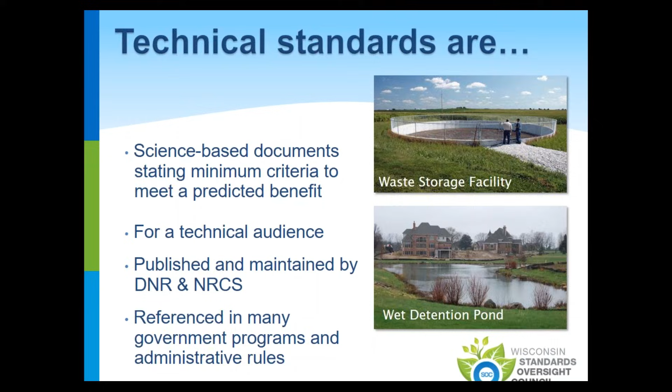SOC impacts these technical standards by deciding, with user input, which standards will be created or revised. SOC selects which of our three predefined processes will be followed, depending on the extent of changes we anticipate in the revision. SOC then supports the collaboration among users to create and approve new criteria. Through all of these updates, SOC seeks to ensure quality criteria, technical standards that can be applied uniformly across the state, and an open and accountable process.

Each technical standard we're going to discuss today followed what we call the full process. With input from the DNR, SOC formed a team of about 10 individuals for each of these standards. Teams were composed of the DNR, DOT, USGS, municipalities, sometimes academia, and always private industry. These teams spent about 8 to 10 months identifying strengths and weaknesses in the existing criteria, discussed their professional experience in the field, reviewed the latest research, and proposed new criteria where they thought it necessary to improve water quality protection and how the standards were implemented.

The new proposed criteria was then reviewed by about a dozen experts in the field and revised by the team based on those expert comments. Each standard was then released again, this time for a 3-week public review, and revised again based on those public comments. Teams wrote responses to each person who commented, explaining why or how each comment was or wasn't addressed. Finally, at the end of the process, each team submitted the document to the DNR for approval or for final tweaks to make sure it complied with DNR code.

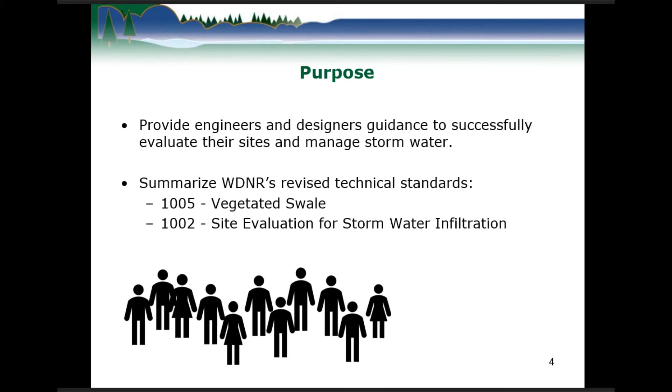I'm going to give an overview of the revised vegetated swale technical standard, and I'll generally follow the same order in which the topics are presented in the standard. I'll point out sections that changed compared to the original 2007 version and spend a little more time on topics for which users have indicated they'd like some additional guidance.

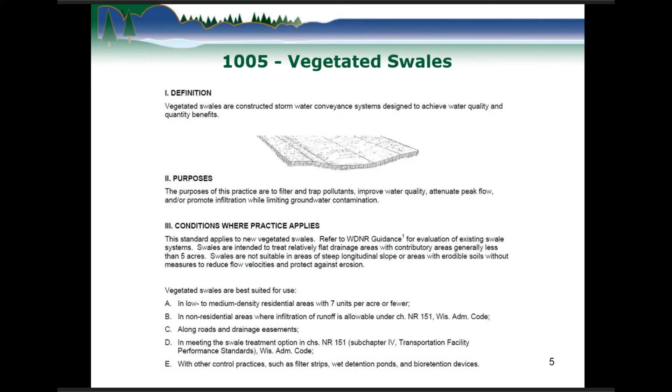Swales are somewhat unique as treatment devices in that they're generally designed to benefit water quality and quantity, as well as to convey runoff. The purpose of swales is to filter and trap pollutants, improve water quality, attenuate peak flow, and in most cases to also promote infiltration. However, swales are not trails, and they are also not parking lots. These activities can cause rutting and compaction, which we want to avoid in our swales.

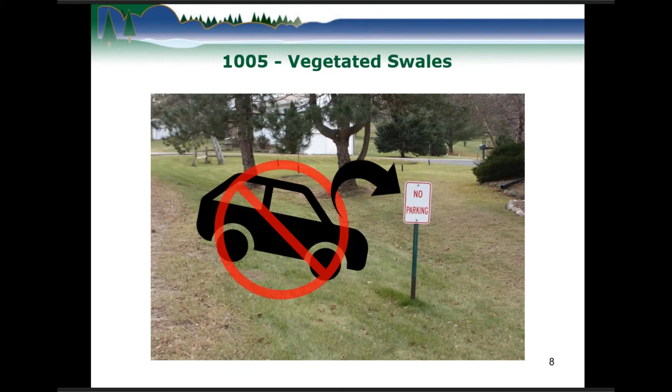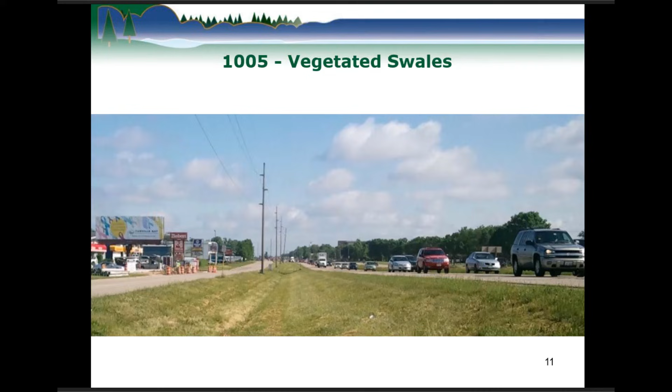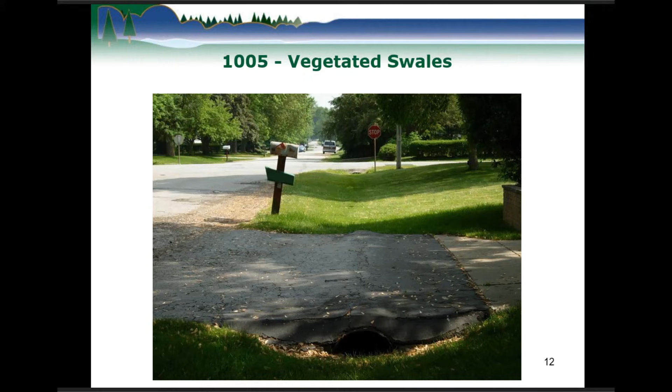Swales can be an effective option for managing runoff when space is limited, such as along roadsides. They also work well in low to medium density residential areas. Swales should generally not be used in areas where they would have a steep longitudinal slope or highly erodible soils, unless additional precautions are taken to reduce runoff velocity and protect against erosion. Swales are typically most effective for treating runoff from relatively flat drainage areas of less than 5 acres in size. Swales also work well with other practices such as filter strips, wet ponds, and bioretention areas.

When you have a rough idea of how your site will be laid out, but before you get too far into designing your swales, you'll need to determine if vegetated swales are a good match for your project. The primary means of sediment reduction in swales is through infiltration. However, in Wisconsin, infiltration of runoff is prohibited for certain source areas, such as some types of industrial facilities and fueling areas, or in certain locations, such as within a given proximity to supply wells. So it's important to do a thorough evaluation of your site to determine if infiltration and swales are a good match.

So let's say you've completed the site evaluation, determined the best areas for infiltration on your site, areas to avoid, and the appropriate infiltration rate to use in your design and modeling. The site plans need to show where the swales will be located in relation to structures, wells, any unusual geologic features, property boundaries, topography, and contributing drainage areas.

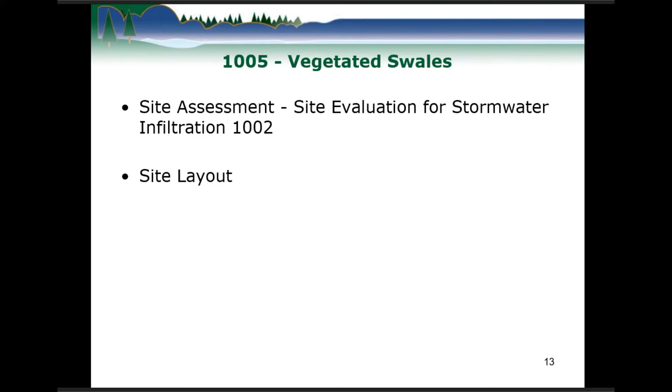For design and modeling purposes, it's also important to identify for each swale whether runoff will be entering a swale as concentrated point source or as sheet flow from the sides of the swale, or both.

In Wisconsin, the department requires stormwater construction permit applicants to demonstrate that their project will meet the post-construction performance standards in our rules. This is typically accomplished by modeling the treatment system and providing the modeling input and output to the department at the time of permit application.

A modeling parameters section was added to the Vegetated Swale standard to clarify meanings of terms sometimes encountered in modeling. One of those terms that we'll spend a little time on is the average swale length to outlet, which is an expression of how far runoff travels on average in a swale.

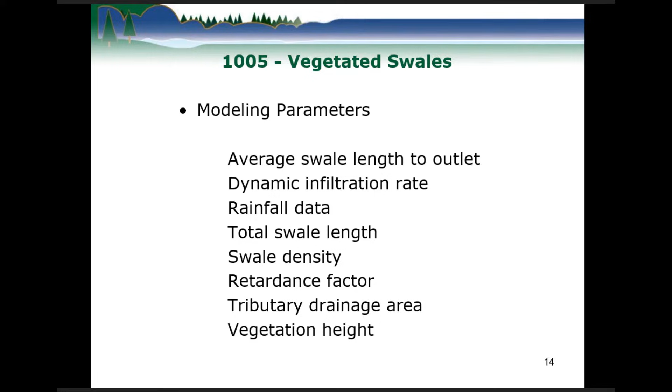Let's look at an example with a 600-foot-long swale segment receiving runoff as sheet flow along the entire length of the swale. Note that the lengths of culverts are not included in this total swale length.

For this example, the average swale length to outlet is simply calculated by taking the total swale length of 600 feet and dividing it by 2, which gives us 300 feet. We take this approach to account for the fact that some of the runoff enters at the top of the swale and has the full swale length available for particles to settle out and for runoff to infiltrate, while some of the runoff enters close to the outlet of the swale without any length of treatment.

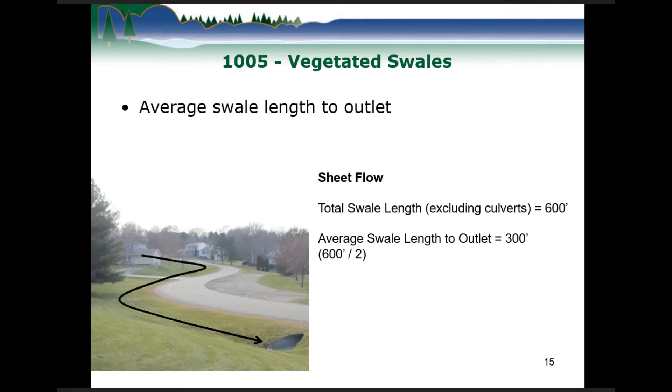In the modeling program WinSLAMM, when you edit the grass swale design parameters, you may need to check the box next to use total swale length instead of swale density for infiltration calculations. Let's see if I can point to it here, in order to allow entry of the total swale length and average swale length to outlet, as highlighted here.

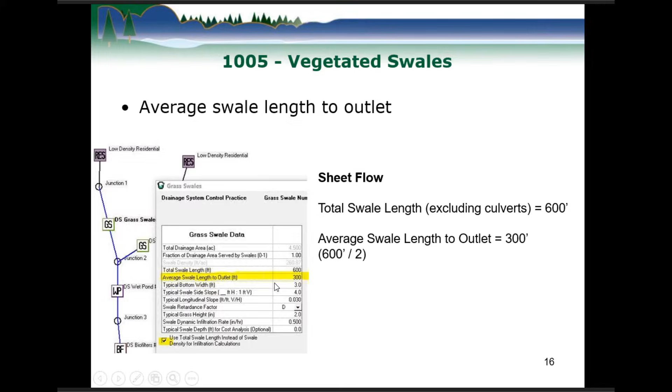Now, if we have a swale segment receiving runoff from a point source, such as from a pond, then the average swale length to outlet is equal to the total swale length.

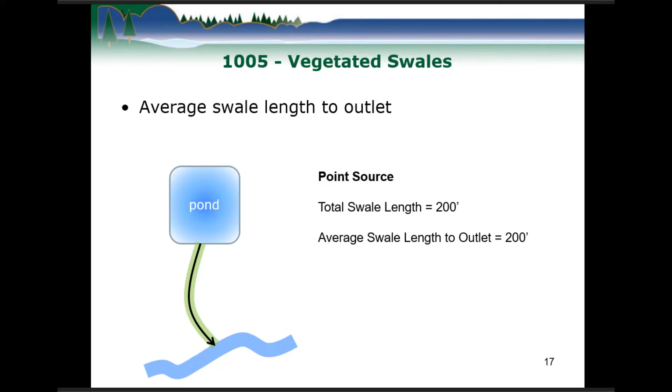In some cases, it may make sense to combine very similar swale segments for modeling. Let's consider this example where all swale segments, shown in blue, receive runoff as sheet flow from their drainage areas shown in green, red, and purple. Swale segments labeled A, B, E, and F have similar land use, swale geometry, infiltration rate, and flow characteristics, so these swales would be good candidates to group together in modeling.

Swale D would not be grouped with the others because, for our example, it has the different land use associated with its drainage area. And although swale segment C may receive runoff from the same land use as segments A, B, E, and F, it isn't a good candidate for grouping with the other segments because it also includes segment D flow from a commercial area and has a higher flow rate and different geometry.

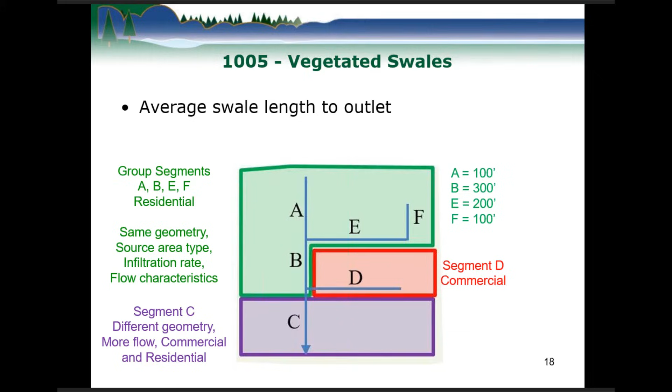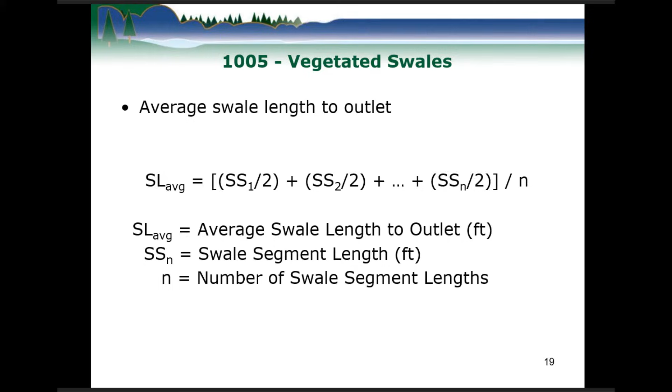Using the equation for average swale length to outlet from the technical standard, we would plug in the swale segment lengths as shown and get an average swale length to outlet of 116 feet for the grouped swales.

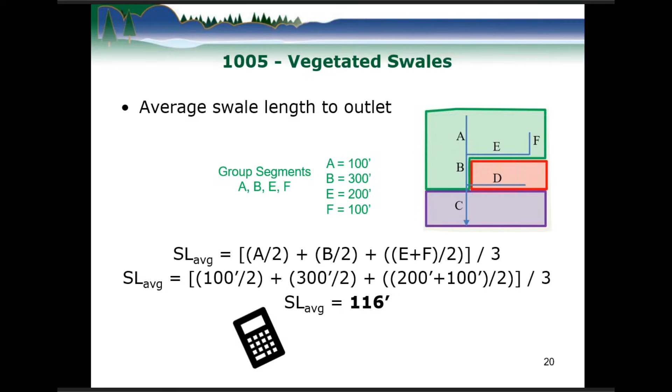So the other terms in the modeling parameters section are more straightforward, so we'll move on to the next section, velocity and depth criteria.

The maximum velocity and depth values did not change from the previous version of the standard. You should still design to keep the 2-year 24-hour peak flow velocity at 1.5 feet per second or less, and water depth at or under 12 inches.

If you're having trouble meeting the velocity and depth criteria, you can include permanent ditch checks, but keep in mind that swale areas immediately upstream of ditch checks may need additional maintenance.

The system should be designed to drain within 24 hours after rainfall. However, we did add an exception. It is okay if the system takes longer than 24 hours to drain as long as wet-tolerant vegetation is planted, and the system drains within a maximum of 48 hours.

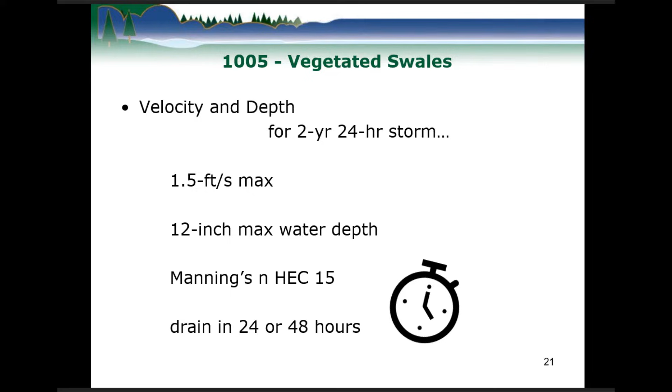Regarding swale geometry, the team did make some changes. Swale side slopes should be no steeper than 3 horizontal to 1 vertical, except for roadway swales, where side slopes as steep as 2.5 to 1 are allowed. If possible, design swales with flatter side slopes to reduce erosion and increase infiltration.

We increased the maximum allowable bottom width of trapezoidal swales from 6 feet to 8 feet, primarily to facilitate swale construction. The reason we limit the bottom width at all is because channelization can occur, in which case modeling demonstrated the system would meet performance standards, but in reality, after channelization, the system is undersized for adequate treatment. So if your project really needs more than 8 feet of swale width, consider lengthwise dividers so that the bottom width of any given cell is no more than 8 feet.

Another change is in allowing flatter longitudinal slopes. Although flatter slopes slow down runoff traveling through the swale, and thereby improve infiltration, the trade-off is that ponding is more likely to occur and kill off swale vegetation. The minimum longitudinal slope allowed has been decreased to 0.5%, and the maximum is still 4%. However, the standard does specify that swale segments with longitudinal slopes less than 1% and an infiltration rate less than 0.13 inches per hour must be planted with wet-tolerant vegetation.

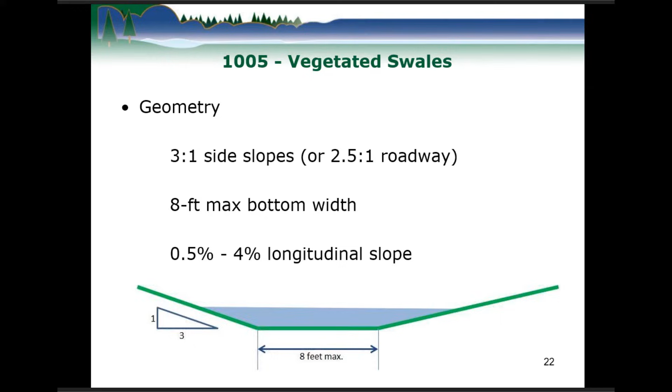The primary reason swales are so effective for managing runoff is due to the vegetation. Vegetation on the surface prevents erosion during rain events, and the root system simultaneously holds soil together to keep it in place and opens it up to improve infiltration. For these reasons, you should carefully consider how to successfully establish vegetation in your swales, how to prevent vegetation from dying off once established, and how to manage problem areas.

Swales should be planted with native vegetation if possible, or turf grass. Depending on expected runoff and swale characteristics, use vegetation that is salt-tolerant or wet-tolerant, or both.

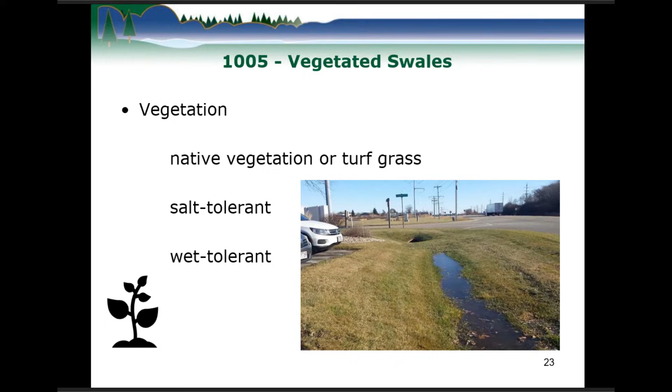The construction section of the standard is new and has detailed information about how to best protect your swales from compaction and clogging during construction. It also has guidance for restoring swales that have been compromised.

Previously, compaction mitigation was always required. While it's still important to decompact soils for the best swale performance, we recognize that for some projects, swale decompaction will not occur. For those situations, we developed an approach to account for compaction by reducing the infiltration rates used in modeling.

However, since that methodology has been incorporated into the site evaluation standard, DNR plans to remove it from the swale standard, and I'll let Jan touch on that topic during his presentation.

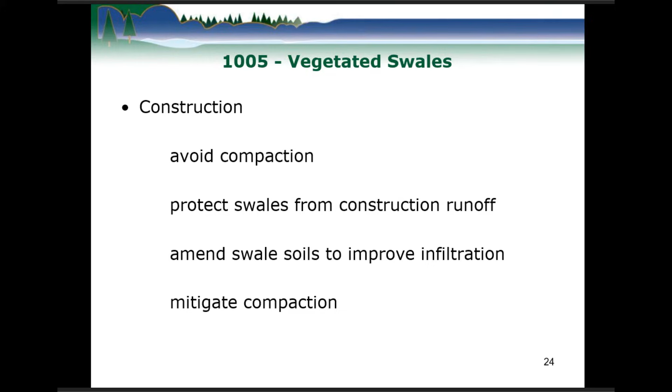The pretreatment section is another part of the standard that the team expanded. Wisconsin rules require pretreatment of runoff from certain source areas prior to infiltration. We'll look at the pretreatment options included in the standard.

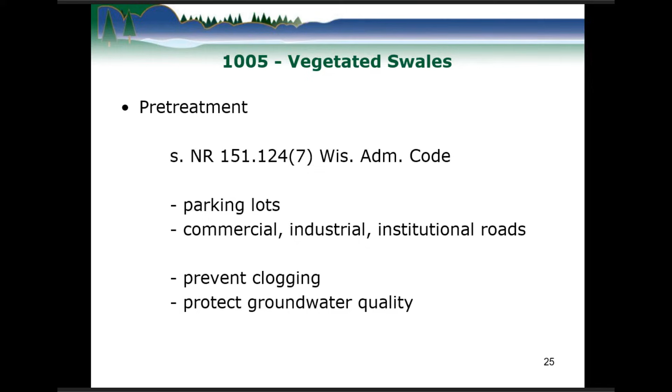Vegetated filter strips are a convenient choice for pretreatment of sheet flow runoff into swales because they're basically just the side slopes of swales. Anything more than 5 feet of filter strip length in the direction of sheet flow can be counted toward pretreatment. Ideally, we'd like to see 10 feet. However, filter strips are not sufficient pretreatment for runoff flowing across more than 100 feet of impervious or non-vegetated areas.

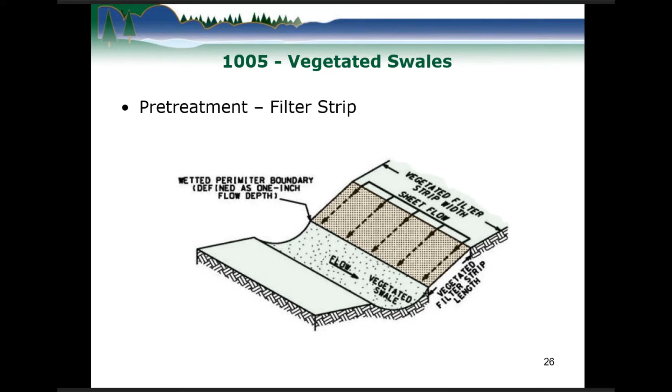When runoff is entering as a point source, a segment of vegetated swale can be used as a pretreatment area. Using Stokes' law, a 1-foot flow depth and 1.5 foot per second velocity, we calculated that 100 micron sized particles, basically sand, would need about 80 feet of swale length to settle out. These pretreatment swale areas are where sand particles will accumulate, and we can expect reduced infiltration capacity, spotty vegetation, and a need for periodic sediment removal. The department considers an 80-foot pretreatment swale segment sufficient to serve a drainage area of 5 acres or less.

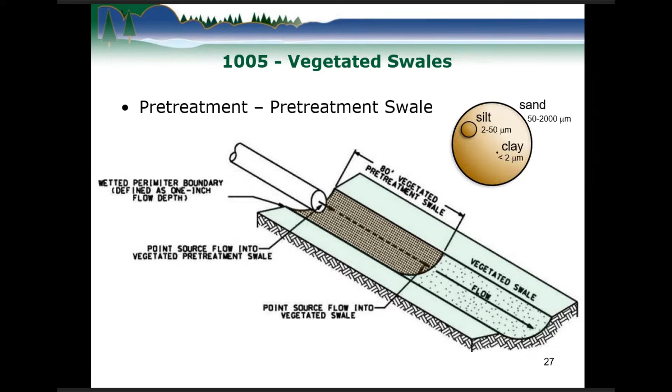We also have wet ponds or other sedimentation devices which can accept runoff entering as a point source or as sheet flow, or both, depending on the site and the type of device. Additionally, your site may need other pretreatment devices such as oil water separators, depending on the source area.

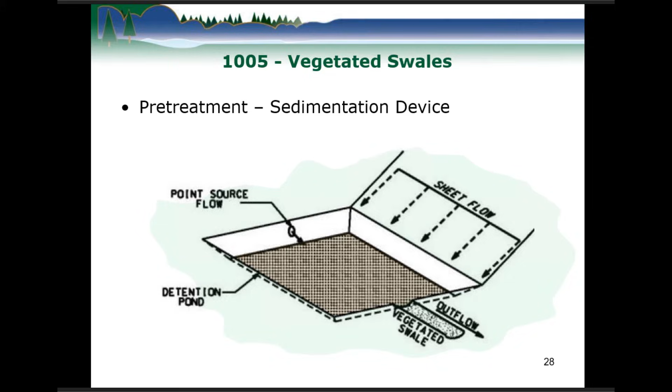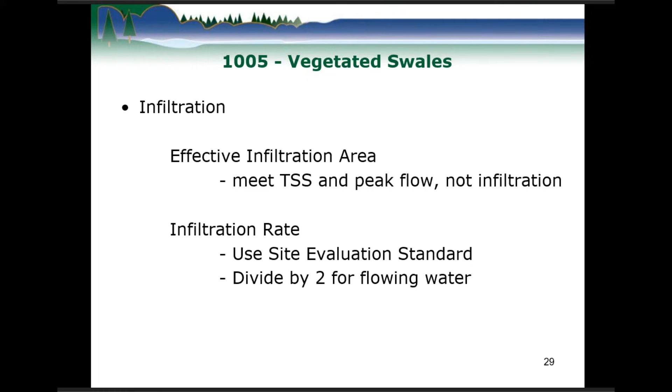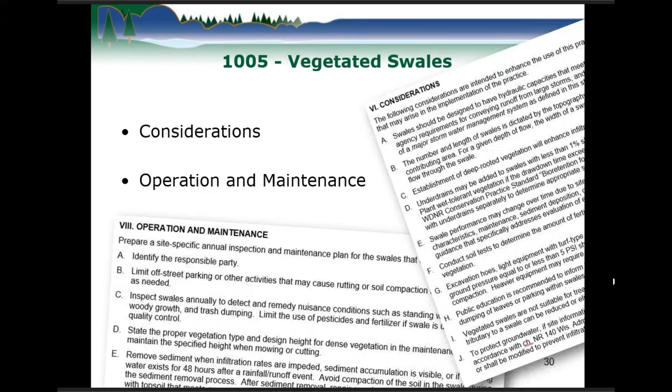I'm going to be telling you a little bit about our new updated technical standard, 1002, site evaluation for stormwater infiltration. And we worked on this over about a year, actually.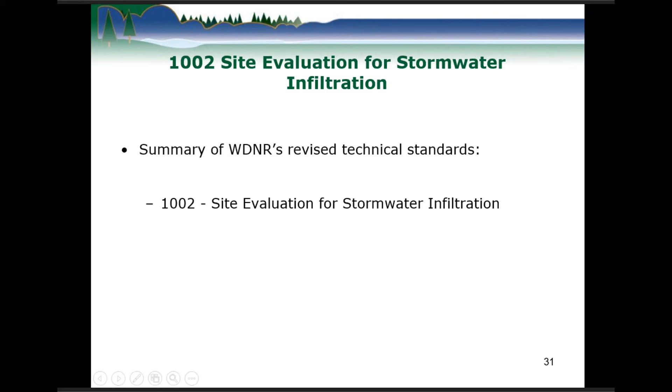One of our goals here, the main goal, is to protect water resources of Wisconsin, also called waters of the state.

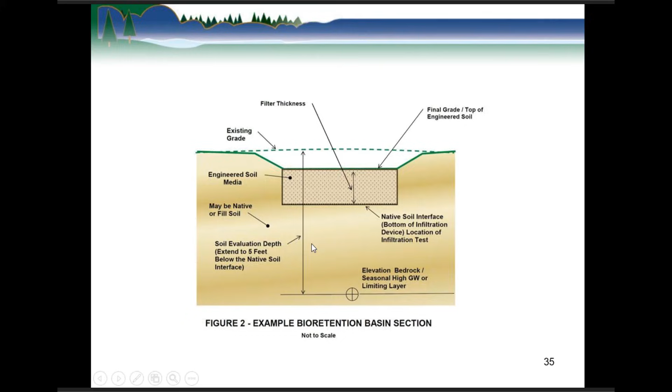So in the technical standard, we laid out 4 steps, A through D, regarding how to evaluate soils for infiltration. A is initial site screening. As you can see, we move to more detail and more field work as we move forward. And bold on the bottom, as Kim had mentioned, when water's moving, it's considered dynamic, and it has half the infiltration of static, or what we typically calculate here in our 1002 standard.

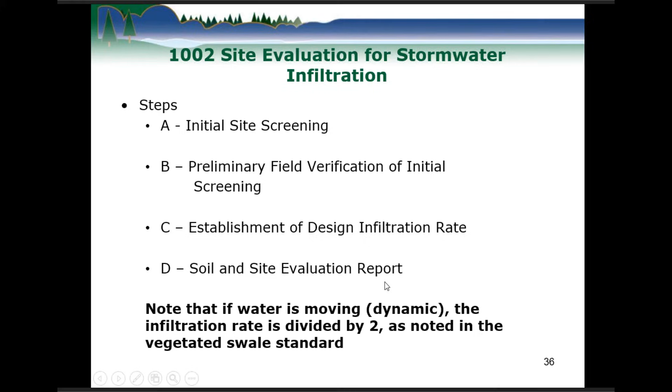So I'm going to move through each one of these steps, give you a short yet tedious discussion.

So with step A, initial site screening, it's essentially a paper study. Common sense, in the office, gather information on a site, and hopefully, in an ideal situation, start out with a good conceptual site plan. It's conceptual so you have an idea of where the drainage is going to go and potential areas to investigate. Look at wetlands, waterways, wells, topography, the full list of information typically due with our notice of intent applications for permit coverage. Karst is important as well, obviously. Channelization through bedrock directly to groundwater is not nice.

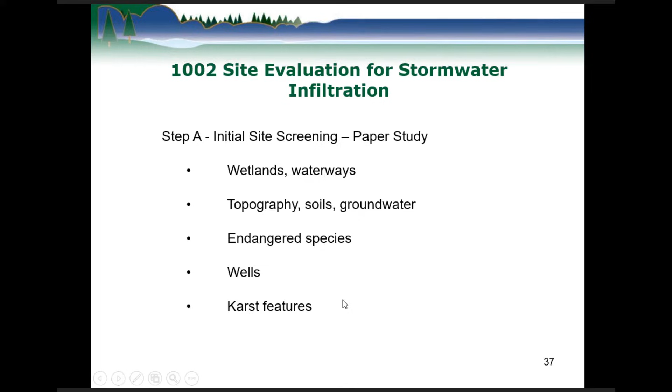So step B, we get a little bit more detailed here and do a preliminary field investigation of the initial site screening. In this case, soil borings are acceptable. Take a look at a potential site, potential area of the proposed facility, and look at the soil texture, and also potentially look at exemptions. Obviously, coarse sand does not work as a marvelous infiltration media. I suppose if you hit hard clay, that also gives you additional considerations to look at.

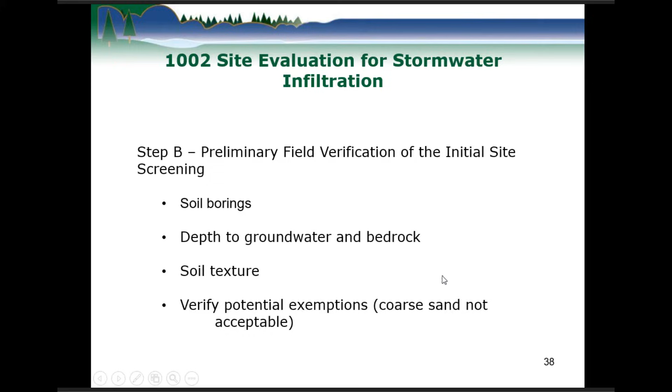Okay, then we move into step C, where the rubber hits the road, really, with looking at the actual infiltration rate at the native soil interface, as I mentioned before, in Figure 2 in the technical standard.

So we've got the 3 steps here: field evaluation specific areas, potential infiltration rate exemption, which is 0.6 inches per hour from an actual measured condition, and then the infiltration rate determination, options 1 through 3, which are a bit more detailed, more straightforward.

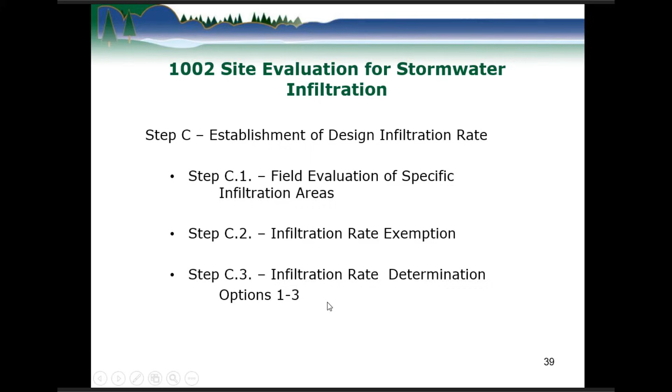So for example, in step C1, field evaluation specific infiltration areas, you can take a look at figure 2 for the test pit location from the native soil interface. Also look at the morphological soil profile. And the beauty of a test pit is that you can look for bedrock, groundwater, seasonal high groundwater, and potential mottling of the soil.

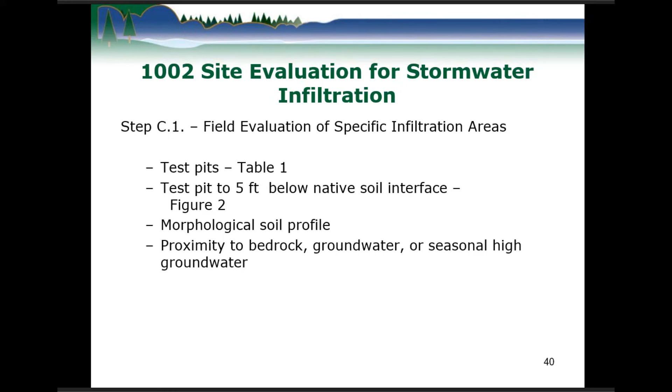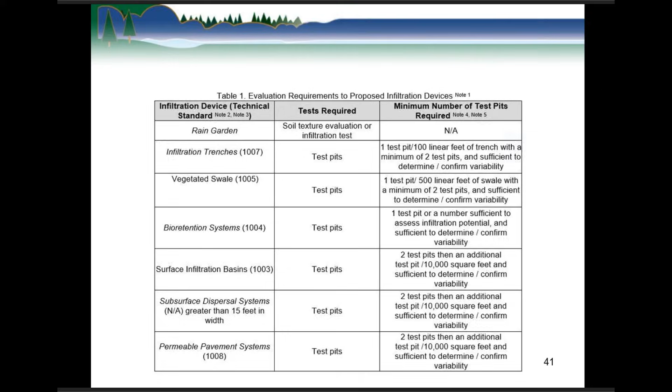Now here's table 1, which summarizes different types of BMPs, for example on the left column, and the test pits, and the number of test pits given the type of trench or basin. Again, just a reminder, the native soil interface and the 5 feet below the native soil for the evaluation depth.

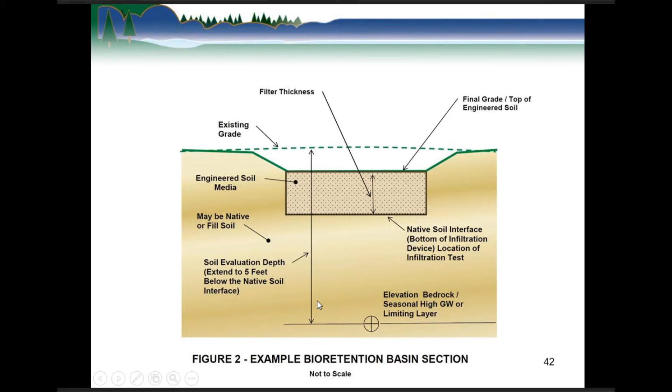So step C2 is infiltration rate exemption, in which after doing a test pit, you're able to do an actual measured infiltration rate to determine if the infiltration rate is at or below 0.6 inches per hour. This is outlined in NR 151 as well. And a perfect condition to look at representative areas.

So step C3 is an infiltration rate measurement. This is where we get into the 3 options, which are a bit more prescriptive and detailed. I'll walk you through these.

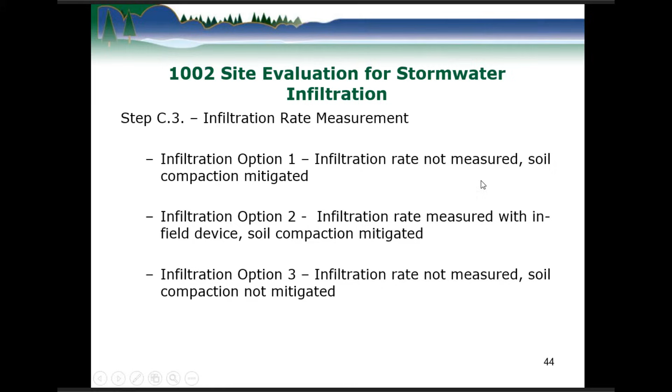Infiltration option 1 is where infiltration is not measured, and compaction is mitigated. Soil compaction is mitigated. Option 2, infiltration measured with an in-field device such as a double ring infiltrometer, and soil compaction is mitigated. Option 3, infiltration rate not measured and soil compaction is not mitigated.

A side note here is, as you go down with more unknowns, the factors of safety increase. So probably an ideal situation is option 1, or option 2, where infiltration rate is measured and the soil compaction is mitigated.

Now, I should back up a second and remind you of mitigation, because in this case we talk about mitigation as deep tilling or deep ripping, or reducing the density of the soil to promote infiltration. Another ideal mitigation is to plant deep-rooted vegetation that will pry open the soil and provide some wicking for surface waters.

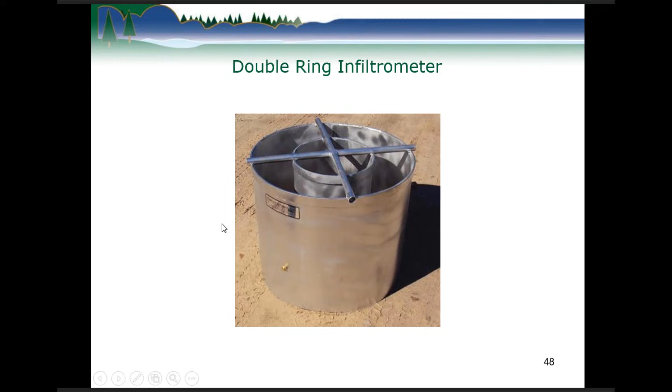There's a typical double ring infiltrometer. A modified Philip-Dunne method could also be used. Here's another double ring in progress. The standard allows a 2-hour double ring infiltration test versus the ASTM 24 hours. It's a lot more expedient and reduces the water usage.

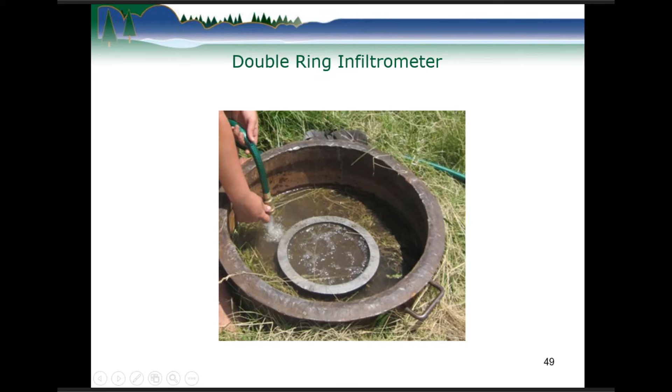So here in option 2, infiltration option 2, determine the lowest textural infiltration rate within 5 feet below the native soil interface. That would be from table 2. Divide T sub N by T sub L, the lowest infiltration rate, to get a ratio R. This is used to determine the correction factor from table 3.

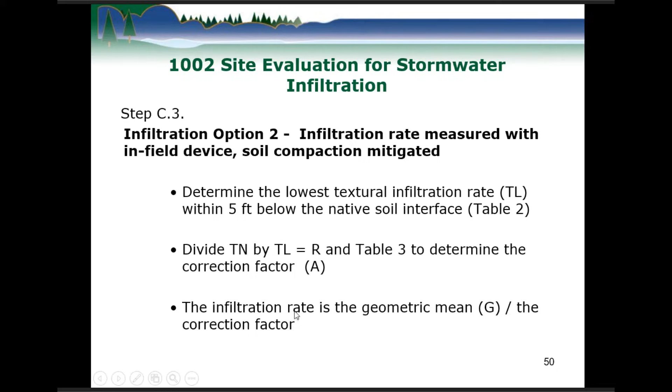Then the infiltration rate is the geometric mean, G, divided by the correction factor.

So here's an example. Say we've got a geometric mean of 1.45, and just a reminder, the geometric mean is defined in our definitions of the technical standard. The textural infiltration rate is 0.24, being loam from table 2. And the lowest infiltration rate within that magic 5 feet below the native soil interface is 0.5, which is sandy loam from table 2.

So the ratio, with the division of those two, is 2.08. Using table 3, the correction factor with that ratio would be 3.5. So the actual design infiltration rate is the geometric mean divided by the correction factor of 3.5, giving 0.41 inches per hour. Here's table 3 where the 3.5 came from, with the ratio falling into this range.

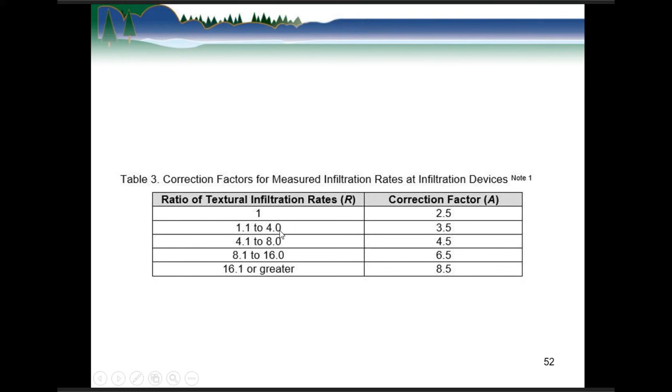So the last option is option 3, where the infiltration rate is not measured and soil compaction is not mitigated. This is probably the worst of the three in terms of unknowns, and thereby the need for a higher factor of safety.

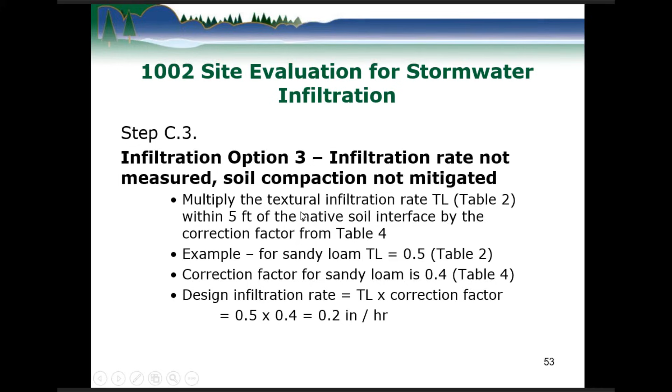So with this situation, we multiply the textural infiltration rate, TL, from table 2 within the magic 5 feet of the native soil interface by the correction factor from table 4. In the example here, if we had sandy loam of 0.5 from table 2, and the correction factor for sandy loam is 0.4, by multiplication we come up with 0.2 inches per hour for the design infiltration rate.

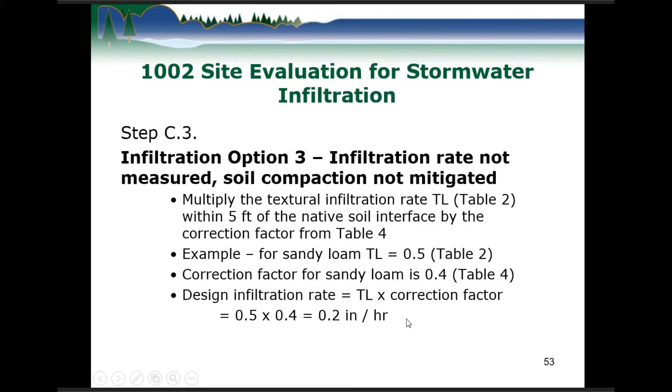A reminder of using table 2 again, and table 4 for the correction factor.

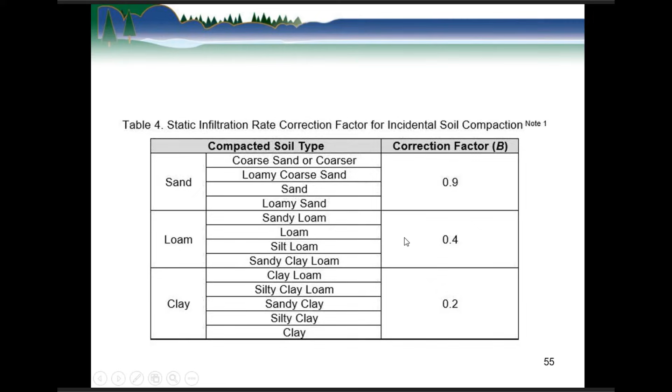So once we've done our information gathering in the office, paper study, and field work, hopefully with actual measurement of infiltration, it's compiled in a brief and concise report with map and key information, the soils information, and the proposed infiltration surface, the rate for design, submitted with the construction plan submittal for permit coverage. One thing I neglected to mention early on would be the tremendous advantage of getting proposed topography with the conceptual drawings, as well as ground shots, existing conditions at the proposed basin, and elevation shots of the proposed native soil interface and bottom of the test pits.

These are all very helpful.

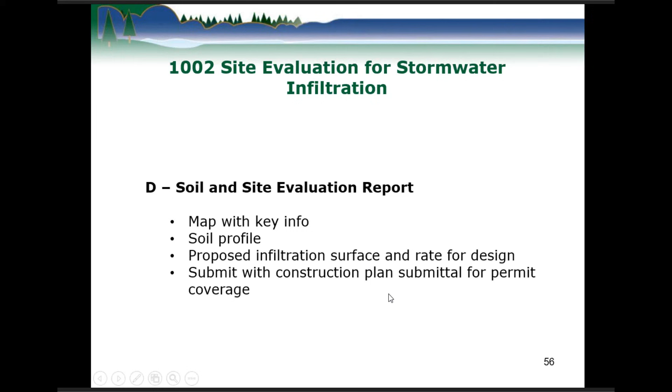Then we go on to qualifications mentioned in the technical standard. Steps A and B, the preliminary steps, can be performed by a licensed professional with experience in soil investigations, interpretation, and classification, acceptable to the local authority. Step C, we made a bit of a change here because of difficulties across the state with infiltration in design. So for the first 5 years, Step C can be performed by a licensed professional soil scientist, professional geologist, or other licensed professional with 5 years experience acceptable to the authority until December 31, 2022. After December 31, 2022, Step C would be performed by a professional soil scientist or professional geologist.

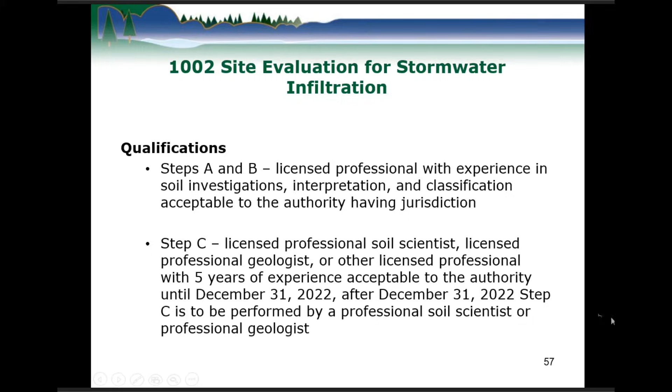So in summary, for the site evaluation for stormwater infiltration, it's important to perform preliminary information gathering, probably starting with the paper study, then getting more detailed as information is gathered. Gather soils and perform test pits with good visual interpretation of the soil and potential for mottling, bedrock, groundwater, seasonal highs. Prepare the soil profile information - we have a form in the back of our technical standard which can be used to document those test pits. Then estimate the infiltration rate for design.

As I mentioned, the more field work, the better. More unknowns if you're not mitigating and not actually measuring the infiltration rate. And then prepare a clean, concise, to-the-point evaluation report.

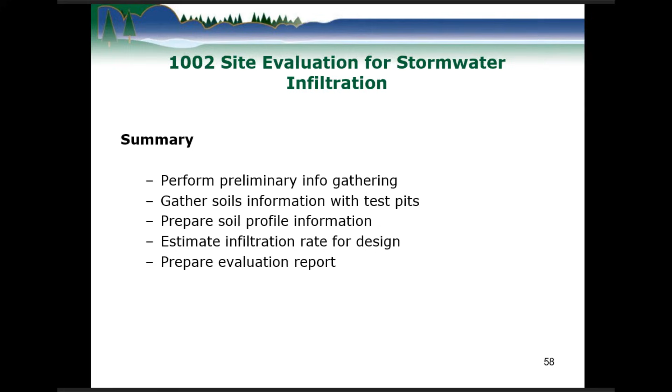The DNR has references on our website, the post-construction technical standards and the construction and stormwater guidance that's existing and proposed here. I'm sure Kim and I would both welcome calls to assist as necessary. Happy to do that. And thank you for attending.

I think we've got around 100 people on the call. I appreciate your attendance, and all questions are good. Kim and I will be happy to see if we can help you out on those.